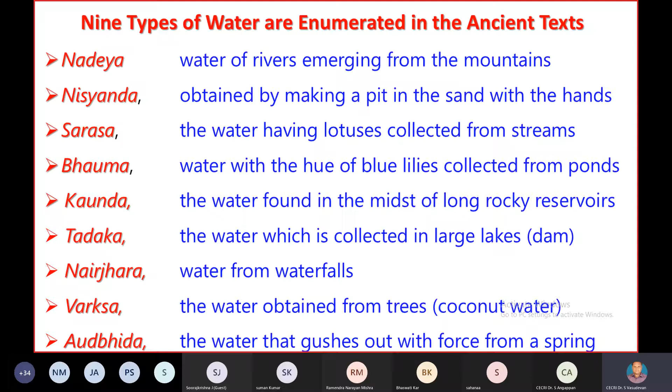If you see Earth's water, we have plenty of it. 97% of the world is covered by water, by the ocean. In that 97%, we have only 3% fresh water. Of that 3% fresh water, 70% is ice caps and glaciers, and the remaining 29% is groundwater. Of that 29%, only 1% is easily accessible fresh water, that is lakes, soil moisture, water vapor, rivers, and water in living things.

Even in that 1% of water, lakes account for 52% and soil moisture is 38%, with the remaining only 1% in living things. So we have to take care of this 1% of water, the lakes, soil moisture, and rivers, everything. Only then can we survive.

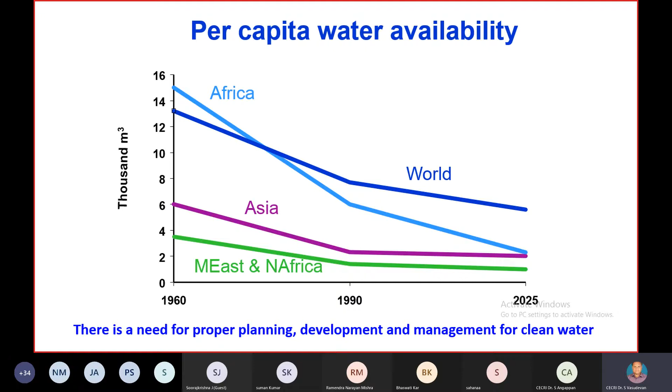In India, we are moving towards becoming a water stress country compared with the rest of the world. For that reason, we want to make sustainable or clean technology for the people living in India. You can see per capita water availability declining all over the world - in Africa, Asia, the Middle East, and North Africa. Everywhere, water per capita is decreasing, so we need proper planning.

If you take India, how is water affected or contaminated? Presently, pesticides, dyes, pharmaceuticals, fluoride, arsenic, iron, nitrate, etc. are the main groundwater quality problems in India. Apart from that, some other minerals are also contaminants, posing the largest threat to public health. We have to remove pesticides, dyes, pharmaceuticals, fluoride, arsenic, iron, and everything using a clean method.

Apart from that, salinity and chloride are also major problems in Indian groundwater quality. Let us see one by one.

As I said in the earlier slide, the main contaminants among inorganic compounds are arsenic, fluoride, nitrate, salinity, and iron. These are the main inorganic culprits in the Indian scenario, accounting for almost 50%.

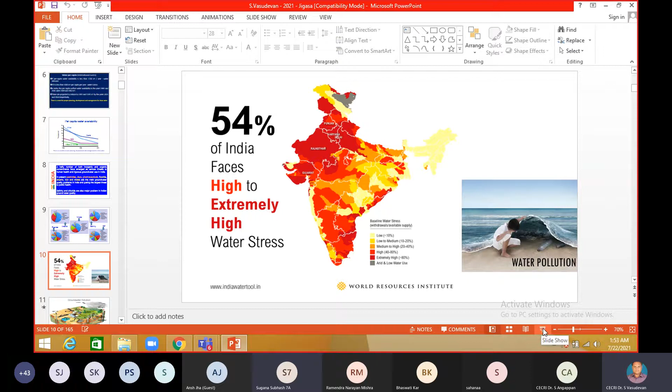Now you can see 54% of India faces high to extremely high water stress. Apart from the land, nowadays you can see water pollution in the sea. You can see one small boy observing how the water was polluted under the sea. So this is the situation in the Indian continent.

The main problem for groundwater pollution is many industries like pesticides and fertilizers and hazardous waste injection wells. So in many places you can get pollution in the groundwater.

So now what we need to do: suppose if you want to treat the water, it should be affordable, clean, and accessible. Please mute your mics. Your technology should be affordable, clean, and accessible.

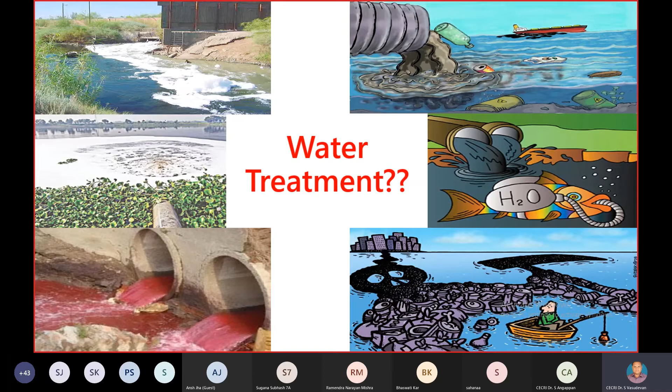If your technology is smart, it has to pass these three main things. So now we go for the water treatment process.

In water treatment technologies, you can classify them as biological process, physical process, physico-chemical process, chemical process, and thermal processes. Each and every process has a merit and demerit, that is advantages and disadvantages. So one cannot say that a technology is not good for treatment, but each process or technology is suitable for some type of water.

So today I am going to talk more about electrochemical water treatment technologies. So why electrochemical technology?

You can see this. This is called environmental compatibility. The main reagent used is electrons, so there is no residue formed. That is the main reason this is environmentally compatible.

The second one is flexibility. Many processes occur simultaneously in any electrochemical cell. Flexibility also means point-of-use production of disinfectants is facilitated by electrochemical technology, and a volume of fluid from microliters to thousands of cubic meters can be treated by this method, with the process working at room temperature and atmospheric pressure. These are the main flexibility aspects in the electrochemical process.

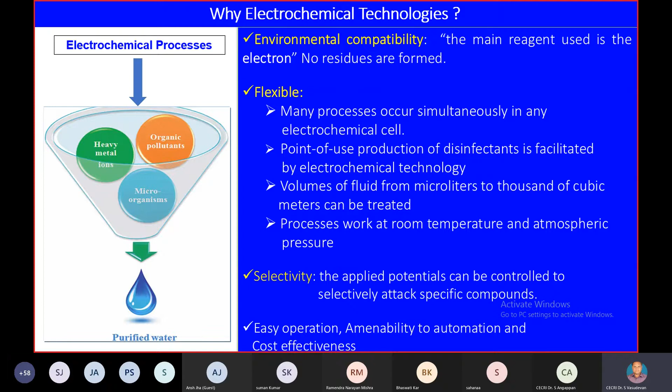And the last and final point is very easy operation, it is very easy to automate, and it is cost effective. That's why this electrochemical technology is a smart one for everyone.

So what is happening inside the electrochemical cell? Dear students, you can assume this is a tank, or a beaker, or a cell—whatever you want to assume.

In the electrochemical system or cell, you have one anode and one cathode. For example, I can say number one anode and one cathode, but it should be multiple anodes and cathodes in very big cells.

So at the anode, you can see 5 things taking place in the electrochemical cell. One is called the electro-oxidation process that takes place at the anode, and another, system number 3, is called electrodissolution, which is nothing but electrocoagulation.

In the electrochemical process, there are 4 processes. Number 1 and number 3 take place at the anode, and number 2, the electro-reduction, and number 4, electro-deposition, these processes take place at the cathode side.

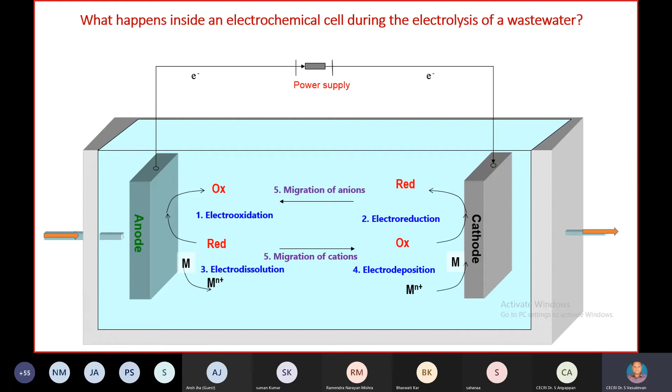So the anode side does one process, the cathode side does another. If you want to remove contaminants by electro-oxidation or electrodissolution, you have to look at the anode side. If you want to reduce or deposit the contaminant, you look at the cathode side. Also, the migration of anions and cations takes place. This is the ultimate electrochemical cell you have to see in your lab.

First, I can show number 3, that is called electrocoagulation or electrochemical dissolution—nothing but electrocoagulation. Here you can see, as I said, there is one anode, one cathode, and here a DC power source was applied. Then what will happen?

The anode will dissolve—some amount of metal will be dissolved as Me+, and at the cathode the water will be reduced and you get OH- ions. So these two reactions take place in the electrocoagulation process. You can see the equations here.

So electrocoagulation, as I told, is the in-situ generation of coagulants—meaning the adsorbing materials, the coagulant. Normally in the chemical method, coagulants are synthesized and kept in tins, and that is used for the removal of contaminants.

Here in our electrocoagulation process, you can generate the coagulant in situ. That means how much coagulant you want, you can fix by the current or potential. So if you want 1 gram of

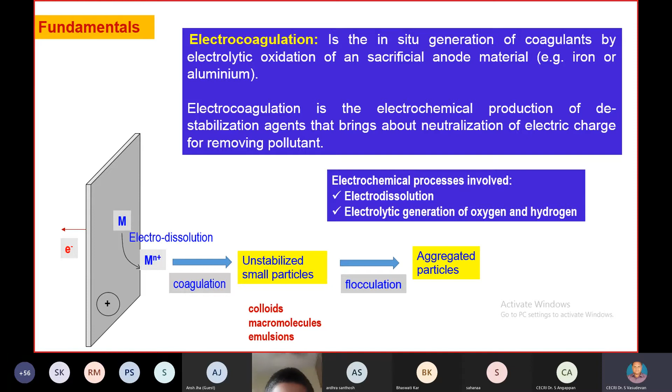If you want 1 gram of coagulant, you can fix the current and potential and remove the contaminant. This is the main advantage of the electrocoagulation process. And as I said, in electrodissolution the metal will be converted to metal ions, then it will be converted to hydroxides. You can see what the materials are.

You can use aluminium, iron, magnesium, and zinc. These are the 4 metals you can use as the anode. You can imagine it in the electrochemical cell. Here is number 3, that is electrodissolution, nothing but electrocoagulation. Aluminium, iron, magnesium, zinc, whatever the metal, you can choose depending upon the contamination.

Earlier aluminium and iron were used, but in my place in CECRI we used magnesium and zinc. We are the first to use magnesium and zinc as the anode material; earlier, in 1990, they used only iron and aluminium. Why I chose magnesium and zinc: if excess aluminium is present in drinking water, it is more dangerous than the contamination, because only 20 ppb of aluminium will affect your brain. That's why we chose magnesium and zinc.

With magnesium, even if you take more than the contamination, nothing will happen to your body. And zinc also, if you take more, nothing will happen to your body. In the present corona period, doctors are prescribing zinc tablets. So we used zinc as the anode material well before this pandemic period. We always use magnesium and zinc as the anode.

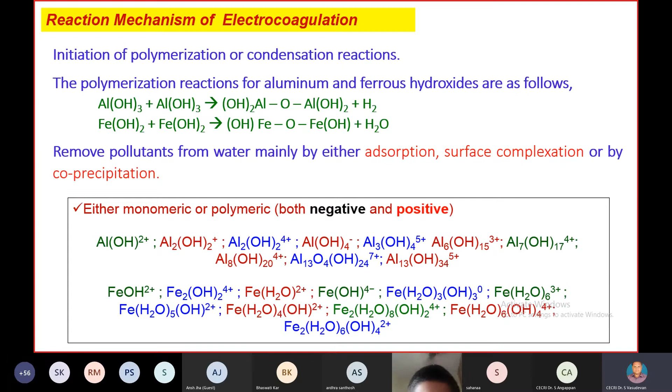In the previous slide, I told you aluminum will form aluminum hydroxide, but it won't form aluminum hydroxide directly. Plenty of intermediates will be formed with plus or minus charge during the electrochemical process. These will be removed by adsorption, surface complexation, or co-precipitation. Whichever the hydroxide, it will be removed by one of these three processes.

You can assume this is the aluminum hydroxide structure. The center is called the nucleus, a negatively charged particle, and around it there are positive charges. The nucleus may be negatively charged, positively charged, or mixed. Both negatively and positively charged intermediates will be in the cell.

So if your contamination is positively charged, it automatically adsorbs. If the positively charged nucleus is there, the negative contaminant will be attached. So whether your contaminant is positively or negatively charged, both will be removed by the electrocoagulation process. This is called the 5-step process.

Number 1 is compression of the diffuse layer by an increase of the ionic strength. That is, as the hydroxide is formed, there is a compression of the diffuse layer. The second step is neutralization of the superficial charges by the adsorption of ions. I told you if the nucleus is negative, the positive attaches, so that neutralization takes place in the second step.

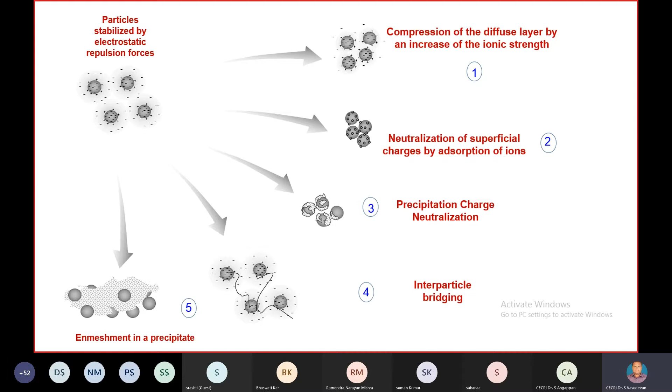The third one is precipitation charge neutralization. All things will be chemisorbed or physisorbed and converted to precipitation charges. The fourth one is interparticle bridging, and the fifth one is enmeshment in the precipitate. We are not able to see these 5 steps, but the removal takes place by this 5-step method.

By the way, dissolved organic matter is also removed by the electrocoagulation process. I mentioned electrocoagulation and electroflotation. What is electroflotation? You can see that on the anode side, there is oxygen formation.

In the cathode side, hydrogen will be evolved. Apart from the metal hydroxide, you can get oxygen in the anode and hydrogen in the cathode. So these two gases are very essential for the electrocoagulation process. One is for turbulence, one is for adherence. So these two gases favor the turbulence and the adhesion process.

That is, it promotes soft mixing conditions and improves the flocculation process. This is because of the turbulence, because of the gas evolved in the electrocoagulation process. Then the second use is adhesion.

Sir, your voice is not coming.

The gaseous microbubbles link to pollutant particles. Consequently, the density of the new species decreases, and this promotes the flotation of the particle. So oxygen and hydrogen will be used for the turbulence and adhesion process. So how can you use this electrocoagulation process for the removal of fluoride? What I said is fluoride in groundwater was higher in Indian states, that is more than 66.

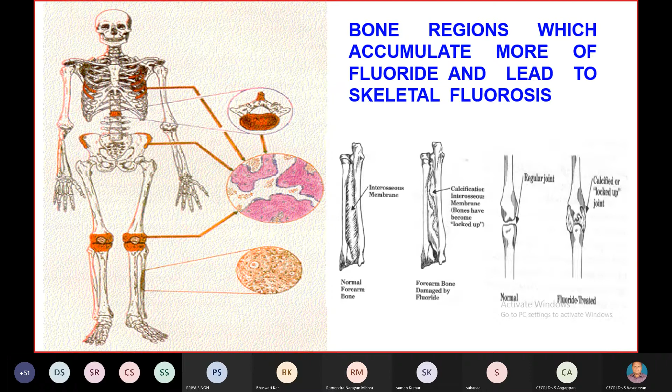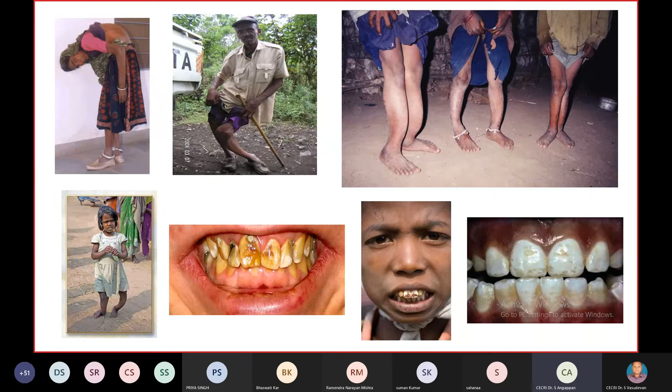Vasudevan sir, again muted, sir. Sir, Vasudevan sir, please. Now okay, sir. I don't know why it is regularly missing.

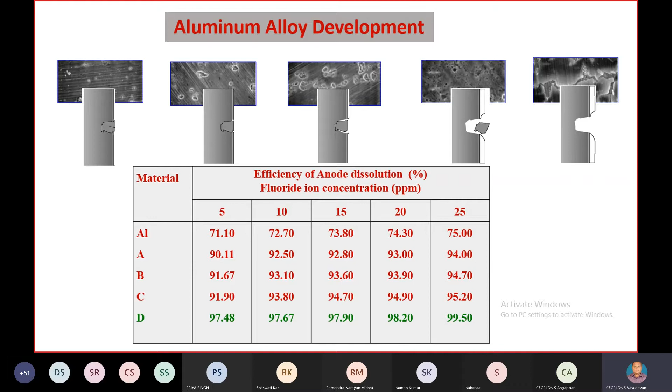So like this, disease will take place. And in our CECRI technology, the specialty is aluminum alloy development. As I told you earlier, if you are using aluminum, it will be dissolved in the water and there will be a problem for your health. So what we thought was to use aluminum alloys. These alloys will dissolve uniformly, and we have not found any aluminum contamination in the drinking water. So this is the speciality of our technology.

This is the anode side. On the cathode side, we carried out experiments with different types of cathode material: aluminum, stainless steel, and galvanized iron. We finally concluded that galvanized iron is the most suitable cathode for the electrocoagulation process. We also did experiments on the electrode configuration, whether it should be a monopolar or a bipolar configuration.

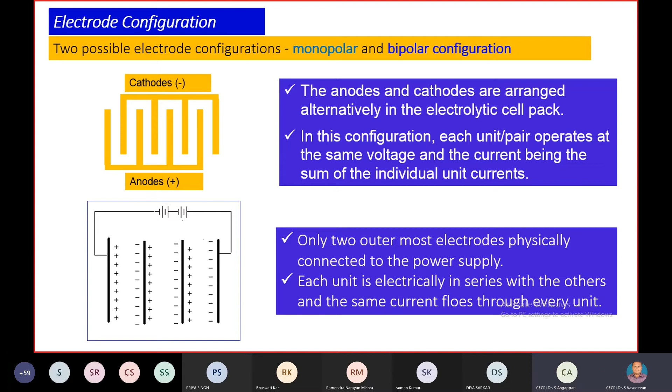Monopolar configuration means DC current is supplied to each and every anode and cathode. In bipolar configuration, only the terminal electrodes are supplied with DC current. We tried this type of electrode configuration in our experiments. We also tried the cell design in the form of a tank type or the flow type. In the flow type, we saw single channel or multiple channel. So we designed plenty of cell designs and came to the conclusion of a direct flow design.

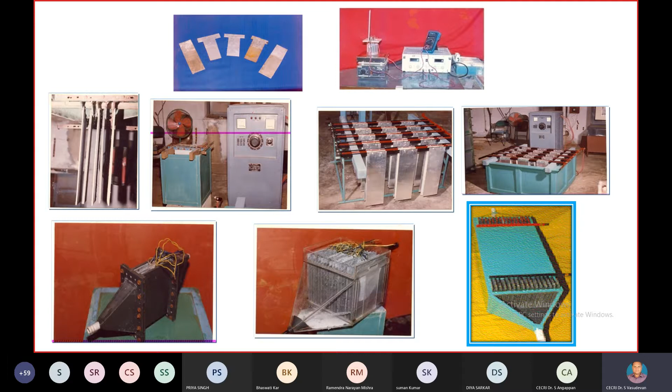You can see we started at the beaker level. Whatever experiment you start, you can start at your basic level. We started in the beaker, and now we have developed a very big electrochemical cell for fluoride removal. This is an example of the electrochemical cell and the chemical method. In comparison, both technologies remove fluoride from 200 liters of water per hour.

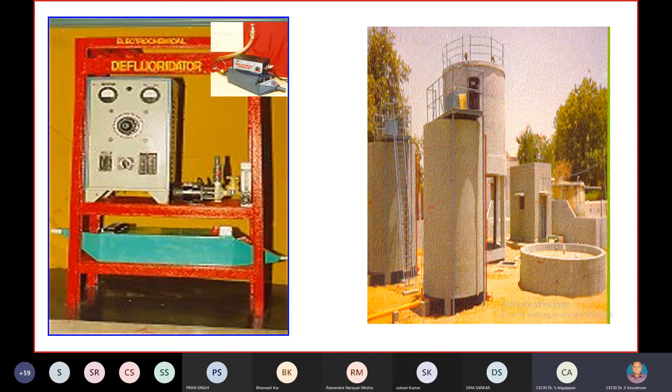You can see in the electrochemical method, the space requirement is very small. In the case of the chemical method, which people are using now, the space, utilities and everything are more. So this is the advantage of the electrochemical method. This is the simple design of an electrochemical defluoridator of 100 liters per hour capacity, and it can be operated by solar photovoltaic cells.

You can see the data. We took fluoride at 5 ppm as the maximum level. The limit is given as 1.5 ppm, but our technology removes it even below, to 0.5 ppm of fluoride. We also tested chloride, calcium, magnesium and other ions. You can see aluminium: in the feed water it is not there, and in the defluoridated water it is also not detected. That means our aluminium alloy is well suited for the electrochemical process.

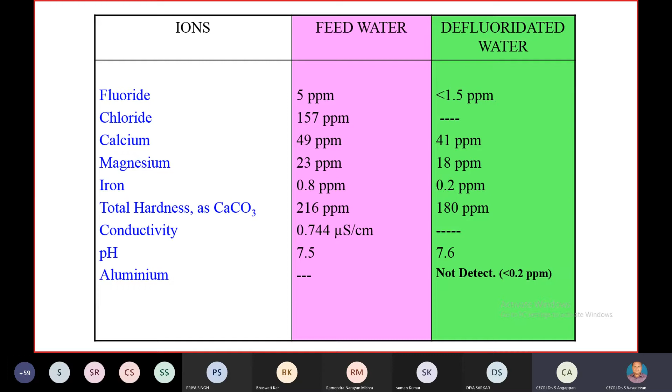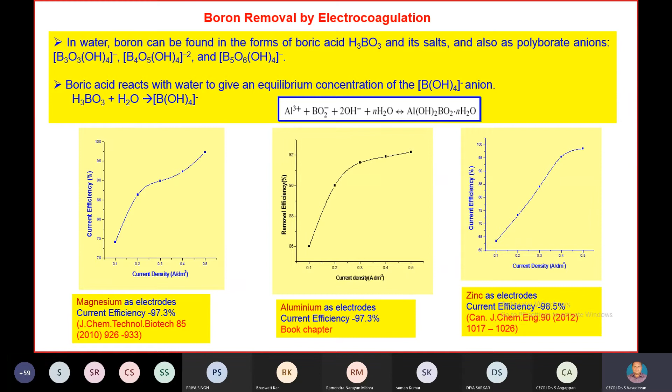So now I am taking water contamination by agricultural activities. India is mainly agricultural. So we thought we could test whether agricultural contamination can be removed by this method. We tried boron, which is also a main contaminant in agricultural lands. We got more than 95% removal efficiency for boron by the electrocoagulation system, and also for phosphate and nitrate, which come from fertilizers. So it is possible to remove phosphate and nitrate too. These phosphate and nitrate are inorganic contaminants.

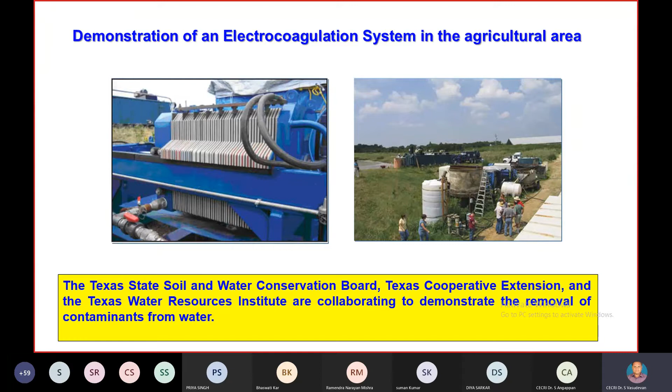At the anode, as I said, one is the electro-oxidation process and another is the electro-dissolution process, that is 1 and 3. Now this is number 1 in the electrochemical cell, called electro-oxidation technologies. Electro-oxidation is one process, but it can be divided into 3: direct electro-oxidation or electrolysis, electro-oxidation by the indirect method, or the advanced oxidation process. These are the 3 types of electro-oxidation technologies, clean technologies available by the electrochemical route.

Like electrocoagulation, there are plenty of options for the anode material, like platinum, stainless steel, boron-doped diamond electrodes. So you can choose which anode is suitable for your contamination and for your pH and conditions. In general, they talk about low efficiency anodes and high efficiency anodes. What does a low efficiency anode mean? Suppose you take phenol as the example: your water has phenol, which is an organic compound.

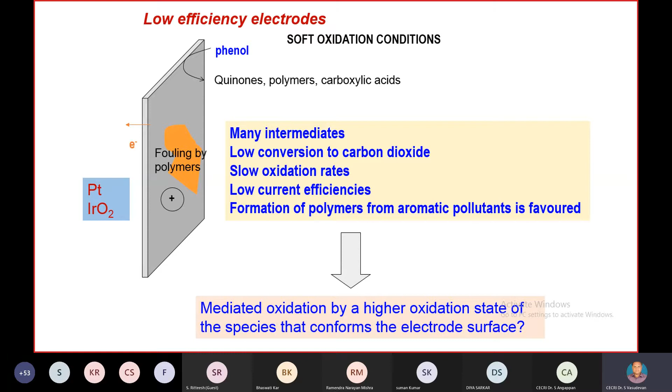For example, if you oxidize phenol, you can see quinones, polymers and carboxylic acids in the water. That means your organic contaminants are still in the water. With a high efficiency electrode, the same phenol you oxidize gives only carbon dioxide, which is the final ultimate product. No intermediates, high efficiency and large current efficiency.

That is, for example, the boron doped diamond electrode, called BDD, or lead dioxide coated. I am giving examples, but there are plenty of high efficiency electrodes available. So one can choose which electrode is suitable for your condition, your contamination, depending upon your solution. Likewise, there are plenty of cathode materials like titanium, mild steel and stainless steel that you can choose depending upon your situation or environment.

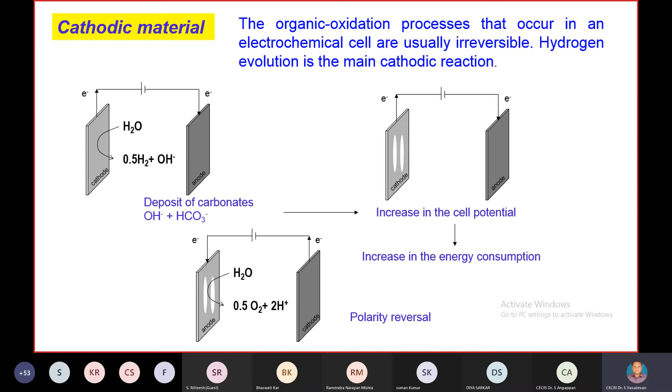Then, like electrocoagulation, you can design the cell, but here the design is different. Here you can make a divided cell or an undivided cell. Whatever contaminant is oxidized should not be reversible. Sometimes it will reach the cathode and again be reduced into the starting material; for that you want a divided cell. If the end product is not reversible, you can use the undivided cell. So here also you can choose a divided or undivided cell.

The next one is nitrate in groundwater. We all know that nitrate contamination is high in India because of fertilizer. With nitrate, you can see the blue baby syndrome. In most village primary health centers, newborn children will be blue in color in the fingers of the legs and hands and in the lips. The doctor says there is an oxygen deficiency, so he will give oxygen to the children.

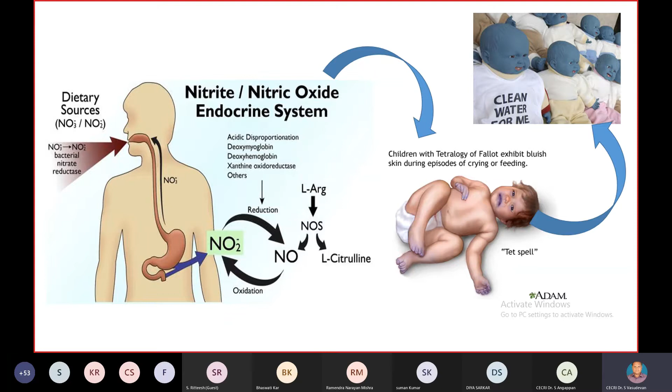Then the blue color will disappear. Because of the nitrate-contaminated water you are taking, it will be converted to nitrite, which takes the oxygen from your body to convert back to nitrate. This system happens in the body, meaning the oxygen in the body will be taken by the nitrate ion. So if you want to remove this type of blue baby syndrome, the water should be free from nitrate.

For that we also did preliminary experiments with different types of anodes and cathodes under an Indo-French collaborative project. We tried very big and small sizes, and finally we got one small electrochemical cell that will remove the nitrate.

Another one, the second type, has no direct electrolysis taking place at the anode. Here it is indirect oxidation. Indirect oxidation means you are generating oxidants, such as silver(II), cobalt and cerium. These oxidants you can generate in the cell, and the oxidant will oxidize your contamination. This is called the indirect oxidation process.

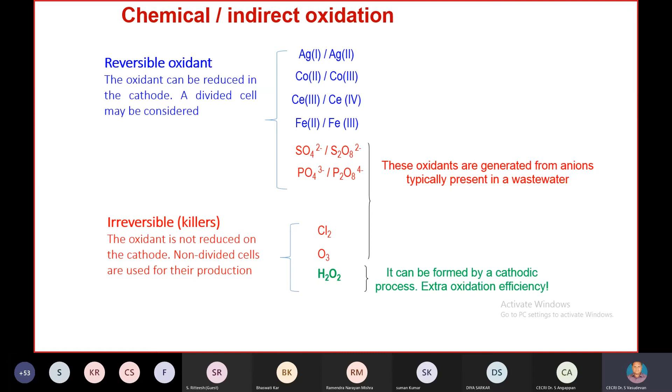Another one is irreversible, called killers, such as chlorine, ozone and hydrogen peroxide. These are all irreversible oxidants. So you can use either reversible or irreversible oxidants to oxidize your contaminant. These are a few examples for silver and cobalt, showing which organic contaminants will be removed.

Another one is sulfate to peroxydisulfate. If you have sulfate as the contaminant in your water, you can convert the sulfate to peroxydisulfate, S2O8, which is a powerful oxidant. Here you are using the sulfate contaminant and indirectly using the same sulfate as the oxidant. Another one is hypochlorite.

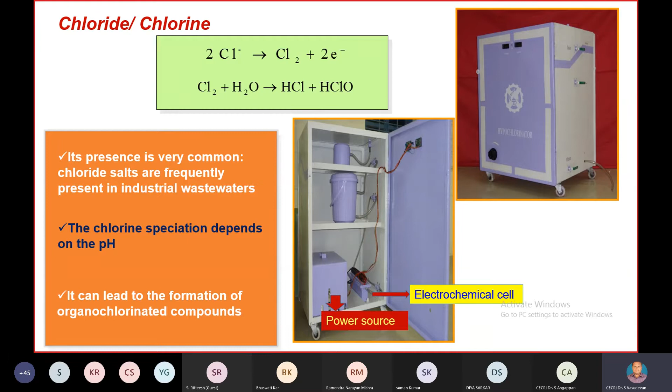You very well know that chlorine and hypochlorite are disinfectants in the present pandemic situation. This also you can generate by the electrochemical process. Another indirect oxidant is ozone. This also you can generate by the electrochemical method. Why ozone and why hypochlorite? Hypochlorite has less oxidation power, ozone has more oxidation power. So if you are not able to oxidize by the hypochlorite, you can use the ozone. Both will be generated by the electrochemical method.

And another is hydrogen peroxide. This has medium oxidation power. So hypochlorite, hydrogen peroxide and ozone are all the main oxidants that can be generated by electrochemical methods. Okay. Another one is the advanced oxidation process, the third type. Suppose you are not able to oxidize the contaminant by the indirect or the direct electrochemical process, you can use the AOP, that is, advanced oxidation process.

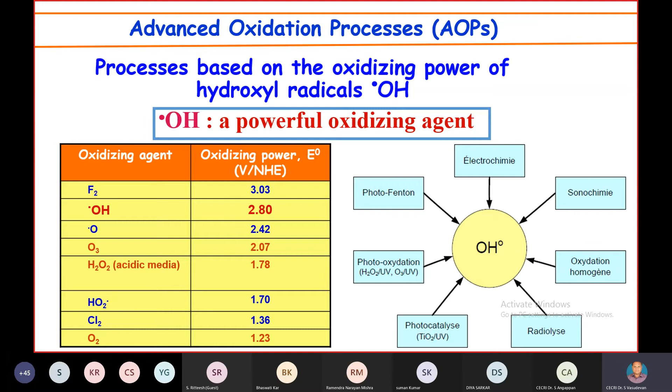Here the process is based on the oxidizing power of the hydroxyl radical. You can see in the table hypochlorite, ozone, hydrogen peroxide. The more powerful is the OH dot. This OH dot has an oxidizing power of 2.80 V versus NHE. So this will oxidize whatever organic contaminant, the persistent organic compounds, that you are not able to oxidize by the earlier methods. You can oxidize them by the advanced oxidation process.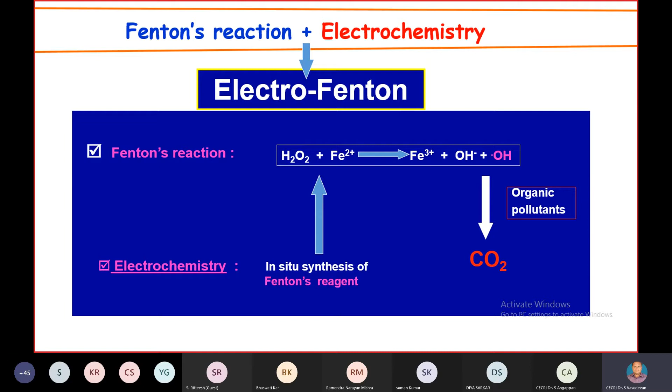This is called the Fenton reaction. People think Fenton is the chemical method: you add iron and hydrogen peroxide. This is called Fenton, normally. Is it possible by electrochemical method? That is called the electro-Fenton process, and yes, it is easy. You can generate the hydrogen peroxide in the electrochemical cell, so there is in situ formation of the Fenton reagent. The advanced oxidation process is nothing but using the Fenton reagent for the electro-oxidation process.

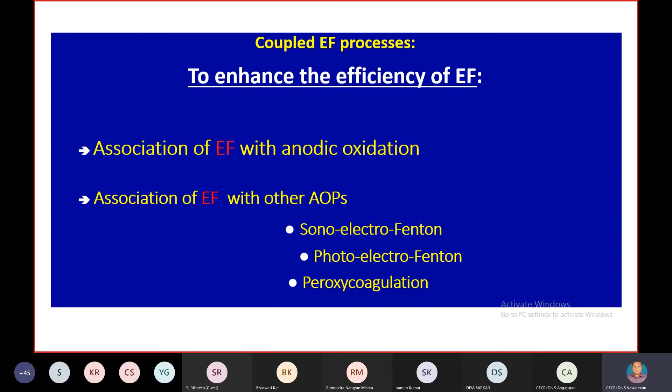So you can easily generate the Fenton reagent by the electrochemical process, called the electro-Fenton process or advanced oxidation process. This can be coupled with different types of systems like sono-electro-Fenton, photo-electro-Fenton. Photo means you use photons, and sono means you use sonic energy for the electro-Fenton process. Then there is peroxycoagulation, a coupling of coagulation and advanced oxidation. You combine the advanced oxidation process and coagulation process. This is one type.

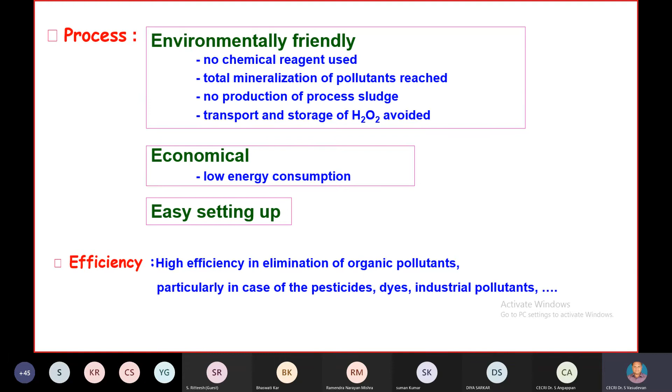Once you understand electro-Fenton, electrocoagulation and electrooxidation, you can immediately think of how to combine the different processes. That's why you have to learn all the different processes. Ultimately the process is environmentally friendly, economical and easy. Setting up this electrooxidation or advanced oxidation process is very environmentally friendly.

Iron in groundwater is common, but there is no electrochemical system for iron removal. But indirectly, if your water is contaminated with iron, you can aerate the water, so the iron hydroxide will precipitate out, then you can filter it. That means you can generate oxygen by the electrochemical method, pass that oxygen and oxidize the water. So here it is the indirect electrochemical process, not the direct oxidation process.

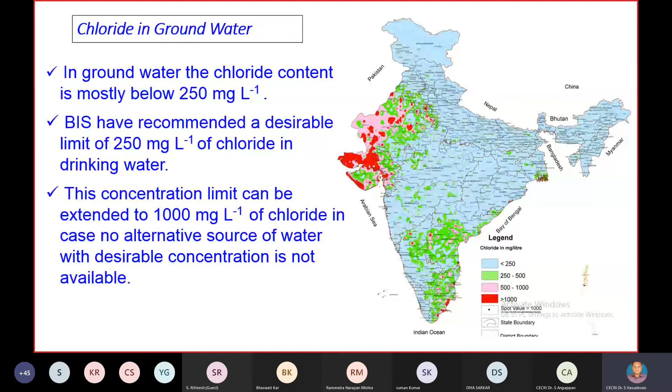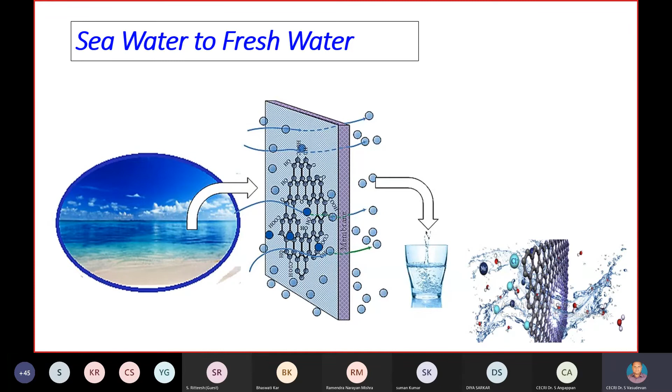Salinity and TDS in groundwater are very serious. Now we can see how to remove them by electrochemical methods. Chloride in groundwater you see only in seashore areas like Mumbai, Chennai. Only there you get more chloride in the groundwater, not in the central part of India. So seawater or seawater-contaminated groundwater can be converted to fresh water. This is our ultimate goal. This will be done by desalination of water.

Okay. Another newly developing technology is capacitive deionization, that is, electrosorption. You pass the current; deionization occurs by applying voltage over two porous carbon electrodes. So your positive and negative charges will be attracted by the negative and positive sides of the electrode. Thereby you can remove the chloride and sodium by the capacitive deionization process.

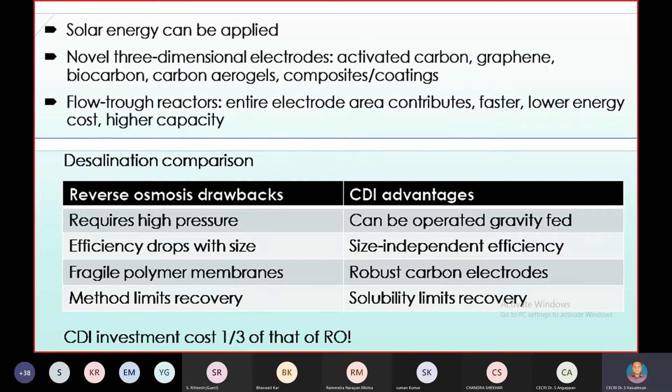After that you can reverse it, all the ions will come out, and you can filter it by the opposite direction. This is a very good advantage, like you can work it with solar energy. This is the novel three-dimensional electrode you can use. This has many advantages over existing reverse osmosis systems, which have large drawbacks. So this is the simple system you can use for this type of capacitive deionization system. This is the simple electrochemical cell for the capacitive deionization process.

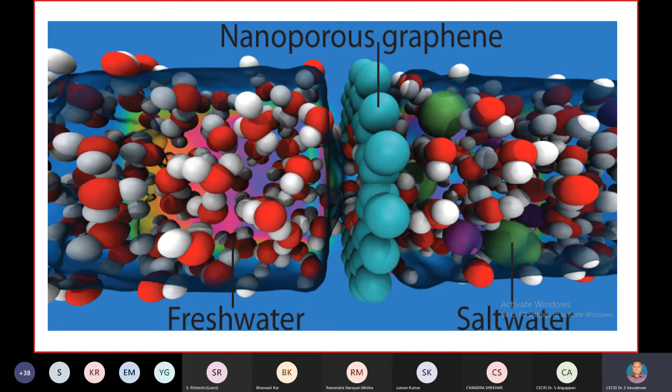Nowadays, you can see graphene. You may have heard about graphene, now it is picking up. What I can say is this is the magic membrane for desalination. So nowadays people are using conventional membranes. If graphene membranes are developed, this will be very much useful for RO systems for filtering anions and cations. You can see this nanoporous graphene, with fresh water and saline water. Very easily, using the nanoporous graphene, you can separate the salt water and get fresh water. Still, the research is going on. The salt rejection percentage is more in the case of graphene. So people are now using graphene membrane for reverse osmosis technologies.

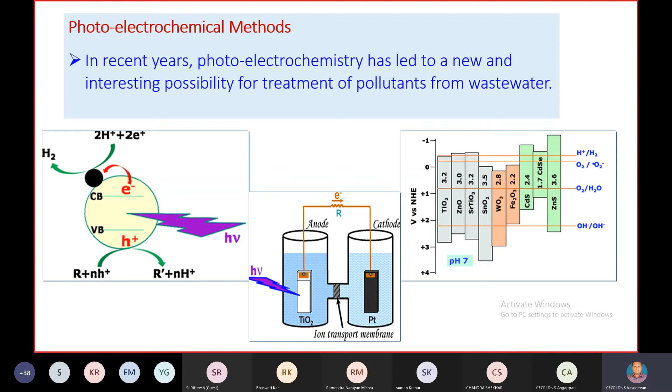So these are all the CSIR CECRI technologies relating to different ions based on smart technologies, I can say electrochemical technology. That means there is no secondary pollution after the treatment. Another thing is the photoelectrochemical method. The work is still going on. This uses photons - we use sunlight and convert contaminated water to clean water.

So in summary, the electrochemical methods are generally cost efficient and environmentally benign purification processes, and enhancement of the methods is often related to material development only. So optimization of the treatment is highly important, especially pH, in most of the process. Once the system was developed, you can just see the anode and cathode, and that's all. Very small experiments can be done for the upgradation of cells.

So up to this, I can talk about the smart technologies for water treatment - that is electrocoagulation and electro-oxidation of three types, and also electrodialysis for the removal of TDS. Now the first part, that is clean water, will be over.

Now I can come to green energy. Today I am going to talk about hydrogen. Hydrogen is the green energy for the present situation, meaning we are going from carbon-based energy to renewable energy, C2R. Earlier we used carbon-based energy and we got CO2 contamination in the atmosphere - that is C. Now we are proceeding to R, that is called renewable energy, free from CO2. Hydrogen is very unique in the periodic table, first in the periodic table. Henry Cavendish discovered it in 1766, and the first industrial water electrolyzer was developed in 1888 - that is, only with a water electrolyzer can you get hydrogen. That was developed in 1888.

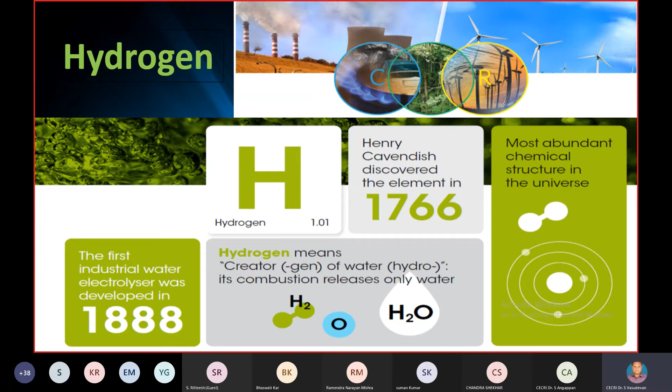So these are all the features of green hydrogen. Suppose in your mind, energy means your eyes look up - that is, you are seeing the sun. That is the ultimate energy. The clean energy is the sun's energy. We are getting 5.6 into 10 power 24 joules per year. So this much clean energy we are getting. For example, the energy emitted in one hour by the sun is adequate to cover the energy needs of the entire world population for one year. You can see how much energy the sun is giving to the earth. So we have to utilize the sun's energy for our future as clean energy.

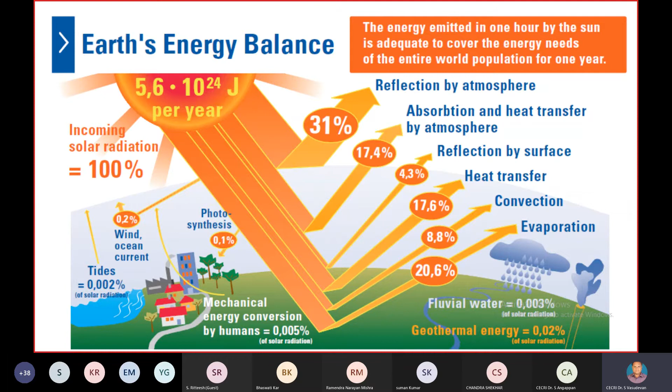If you take the energy storage system, we have plenty of energy storage systems called batteries, pumped hydro systems, flywheels, supermagnetic storage, and heat energy storage. You can generate energy by different methods. So here I am going to talk about only the energy based on hydrogen.

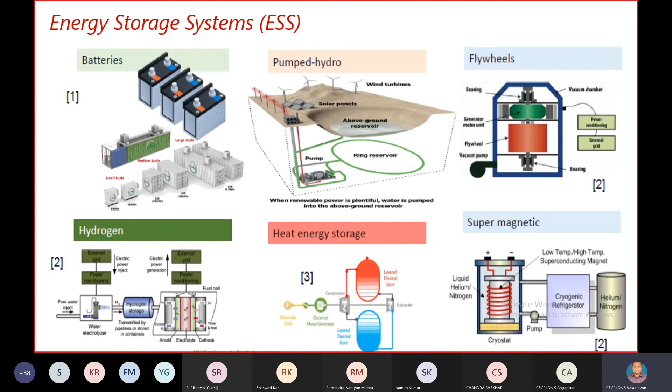So why am I talking about hydrogen? The World Organization said to reduce greenhouse gas emissions by 17% by 2020 and 83% by 2050 from the 2005 baseline. This is the world standard for greenhouse gases, and to reduce net oil imports by half by 2020 from 2008. There are 5 rules given for climate change, and hydrogen at scale strongly impacts number 1, number 2 and number 4. So in these 3 places, hydrogen will play a vital role for green energy for the world.

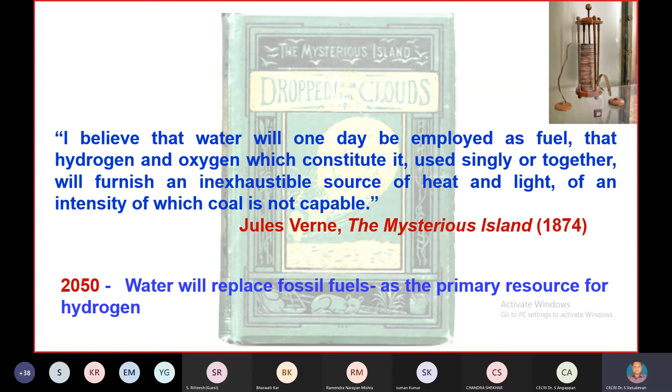In 1874, Jules Verne said, 'I believe that water will one day be employed as fuel, that hydrogen and oxygen which constitute it, used singly or together, will furnish an inexhaustible source of heat and light, of an intensity of which coal is not capable.' These words were written in 1874 itself. They predicted that in future hydrogen will be the main energy for the world. I can assume the world is assuming that by 2050 water will replace fossil fuels as the primary resource for hydrogen. So in 1874 itself, it was predicted that hydrogen is the ultimate energy for the world.

This is the petroleum age, which you can take as the transport side. In 1956, Hubbert predicted the oil production rate, from 1900 to 2100. This graph was drawn in 1956. They said that oil will be completely zero in 2100, not 2050, not 2060. But even in 2040 we need oil. The peak oil production was around 2000, and by 2025 the price of oil is assumed to be $100 per gallon. Automatically the price will keep rising, and by 2100 we assume there is no oil production in the oil wells. So we are going towards zero oil by 2100.

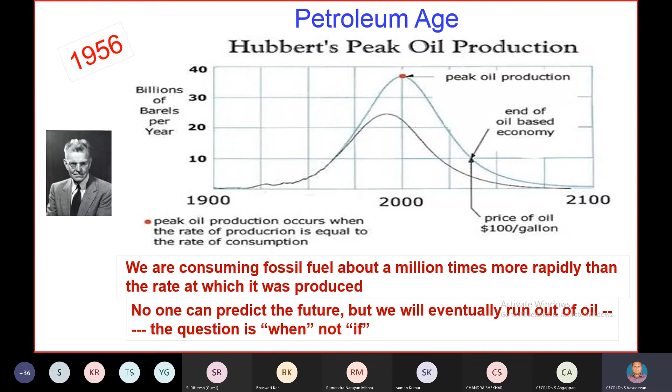So to achieve these goals, India has made the Intended Nationally Determined Contribution, called INDC. India's plan is 40% of power from non-fossil fuel by 2030, and to reduce the emission intensity of its GDP by 33 to 35% by 2030 from the 2005 level, and create an additional carbon sink of 2.5 to 3 billion tons of CO2 equivalent through additional forest and tree cover by 2030.

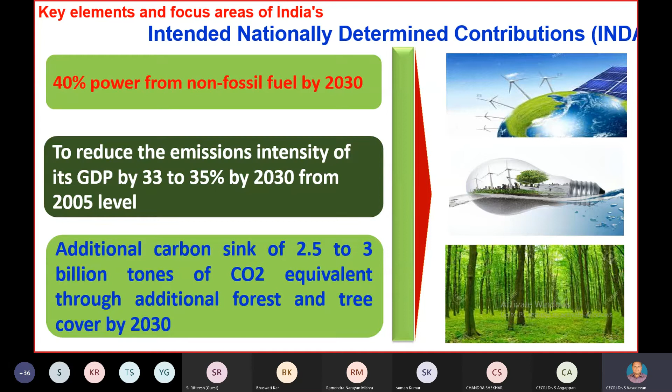So whatever you are developing, hydrogen or batteries, whatever it is, we also have a plan to grow trees. I'm requesting all of you to grow trees. We can remove CO2 by 2.5 to 3 billion tons from the atmosphere through afforestation.

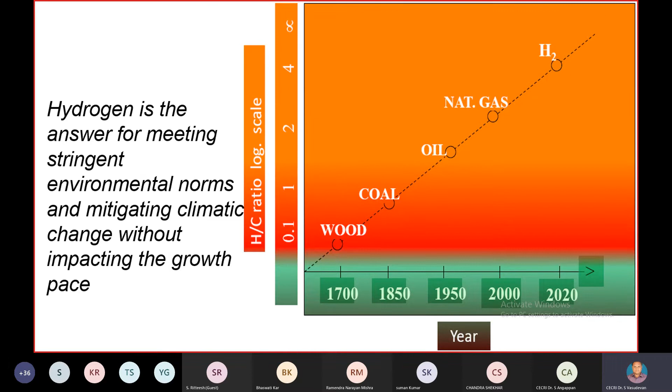So now, why am I talking more about hydrogen? What is the big deal with hydrogen's properties? I am going on talking about what is there in hydrogen.

You can compare the energy density in megajoules per kilogram. Lithium battery has 0.54, gasoline has 46.9, and hydrogen has 140 megajoules per kilogram. That means hydrogen has 220 times more energy than batteries and 2.6 times more energy than gasoline. This is the big advantage with hydrogen. Also, the upper heating value is more for hydrogen than methane, diesel and gasoline. That's why the entire world is talking more about hydrogen nowadays.

And apart from that, hydrogen is multifunctional. It is used for transportation and also in industries, transport, heating, and power generation. So it connects energy, mobility and industry. This is the multifunctional nature, that's why it is more advantageous, energy wise and functional wise.

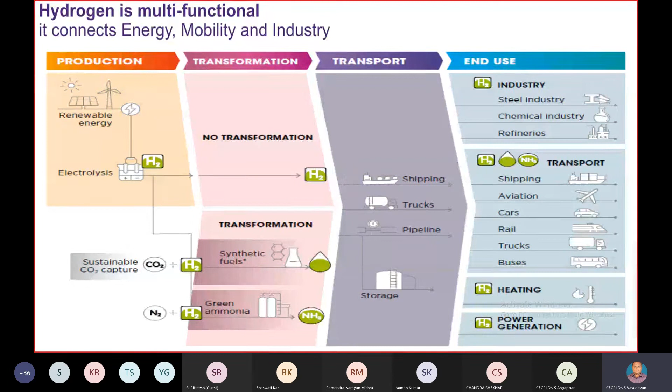It is advantageous. So before going to hydrogen, what are all the things you have to think? If I want to drink water, I have to see whether I go by walk or by run. So many factors are there to drink one cup of water. So before going to hydrogen, what are all the things you have to do?

One is production, then storage, how to transport, how to deliver, and what are all the applications, what is the efficiency, and we have to give awareness about hydrogen, and you can also take care of the safety codes and standards. So it is not very easy to implement hydrogen energy immediately. You have to think of each and every angle, from production to the end, to safety.

In earlier days, people were very much afraid to use LPG gases. Now everywhere LPG gases are used because of the safety codes and standards. Like that, for hydrogen also, it is not just production, storage, or delivery, but you have to give the safety codes and standards for hydrogen energy.

Suppose in the case of hydrogen production, I am talking more about hydrogen production, meaning we are concentrating on hydrogen production origin. So hydrogen production means you can think you can simply split the water and get hydrogen and oxygen, but it is not like that. Even in production, there are different colors, called green hydrogen, gray hydrogen, blue hydrogen, yellow hydrogen,

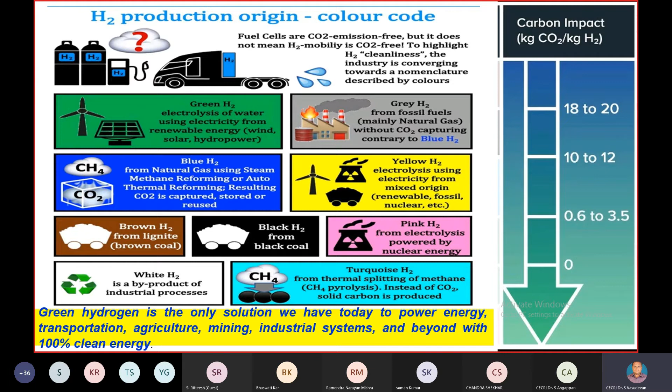Yellow hydrogen means electrolysis using electricity from mixed origin, that is renewable, fossil fuels, nuclear, etc. So depending upon the preparation method we can call it gray, blue, yellow, like that. So ultimate is green hydrogen, that is electrolysis of water using electricity from renewable energy only, either wind, solar, or hydropower. That means the carbon impact is zero for green hydrogen.

That means green method of production of hydrogen. In green hydrogen, you are electrolyzing using renewable energy. In that, we have three systems, called alkaline electrolysis, PEM electrolysis, and high temperature electrolysis. Each of these terms is different. If you take alkaline, the electrolyte is KOH. In the case of PEM, the membrane itself is the electrolyte. The high temperature one needs more temperature. So we can see one by one what are the three types of electrolysis.

One is without electricity, that is from renewable. Another one is with electricity from renewable. Whatever the case, the thing is renewables. You can produce hydrogen by renewable sources.

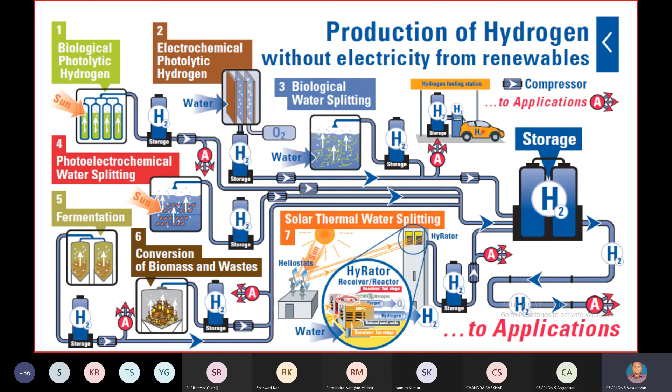If there is no electricity, but the source is renewable, you can choose biological photolytic hydrogen, or electrochemical photolytic hydrogen, or photoelectrochemical water splitting, or biological water splitting, or fermentation, and solar thermal water splitting. So these are all renewable, but you need not use electricity. By this way also you can produce hydrogen, without bothering about electricity, but this is the renewable approach.

Another approach is renewable but with electricity. You can use electricity from a renewable source, that is hydropower, wind power, bioenergy, geothermal, solar thermal. So there are two types of methods: you can produce hydrogen with electricity and without electricity by the renewable process. So you can opt for either electricity or without electricity for green hydrogen production.

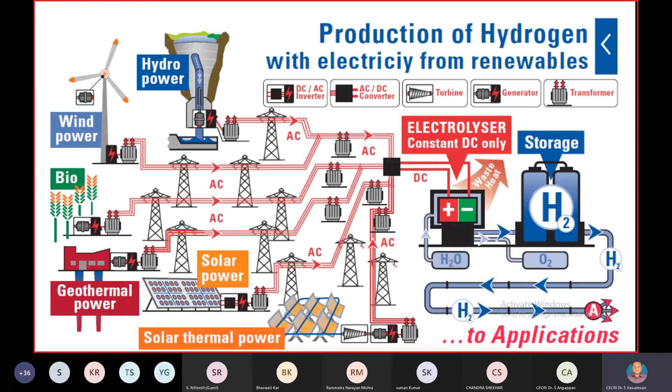And you can see the first type is alkaline electrolysis. What I said is you can use potassium hydroxide as the electrolyte. Here you can use 25% KOH, that is, highly concentrated KOH or NaOH will be used as the electrolyte, and you can electrolyze. You can get highly pure hydrogen. The temperature is 80 degrees centigrade.

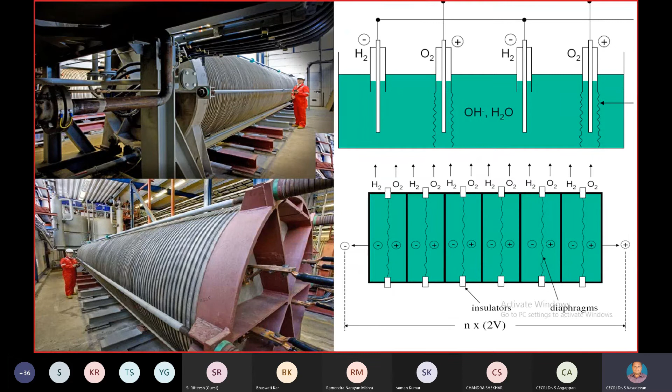Okay, for that, 4 to 5 units is required to produce 1 meter cube of hydrogen. This is one type of electrolyzer called the alkaline electrolyzer. You can see this is a 100-year-old technology, but still research is going on to improve the efficiency of the electrolysis system.

For that, our contribution is we developed a new electrode, that is, the anode, for this type of alkaline electrolyzer, that is high surface area nickel. Till our development, this type of electrode was imported from foreign countries. Now under Atmanirbhar Bharat, this is indigenously available. Now people are using our technology in the alkaline electrolyzer.

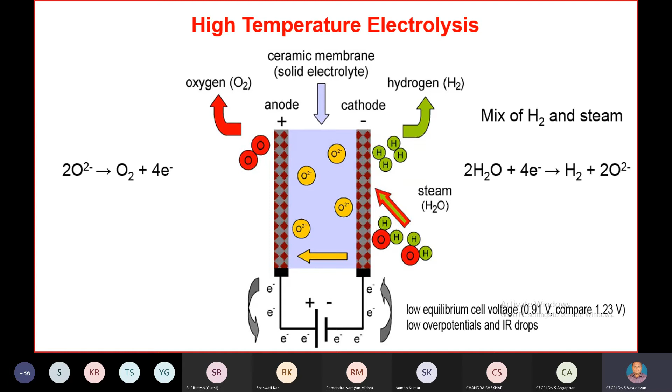And this is the high temperature electrolyzer. It requires more temperature, almost 800 to 900 degrees centigrade. So wherever the temperature is in excess, you can use high temperature electrolysis. In most places this type of electrolysis is not suitable. So still research is going on for the ceramic membrane and anode and cathode materials.

Another one is called proton exchange membrane. This is our new thing, our technology. This is called proton exchange membrane. We developed it from start to bottom in our laboratory.

Here we need a membrane. In the alkaline electrolyzer we want KOH, NaOH or a liquid electrolyte. But in the case of solid polymer electrolyte, that is called proton exchange membrane, you need only purified water. The membrane itself acts as the electrolyte. That is, you can generate hydrogen from water only. No need of any electrolyte, acid or alkaline. This is the main advantage of the proton exchange membrane.

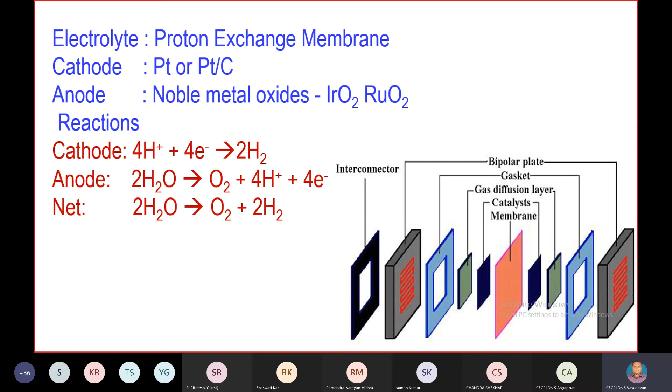So here the electrolyte, as I said, is the proton exchange membrane, but the disadvantage is we are using noble metal oxides, and noble metals are not available in India. So now our laboratory is going for non-noble metals. Whatever material is available in India, we have to try for indigenous technology. Until now, the materials were all imported from foreign countries.

So like that, you can select different electrocatalysts like rutile type, perovskite type, spinel type. Plenty of anodes are available. You can try. And in the cathode also, you can go for different cathodes like noble metal, non-noble metal. Noble means it is costly, non-noble metal is less cost. So we are now going towards non-noble metals.

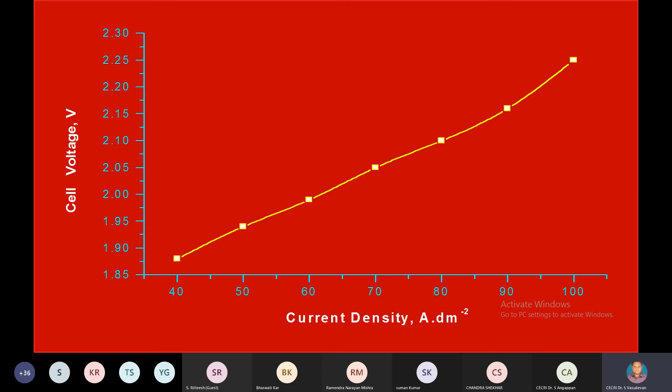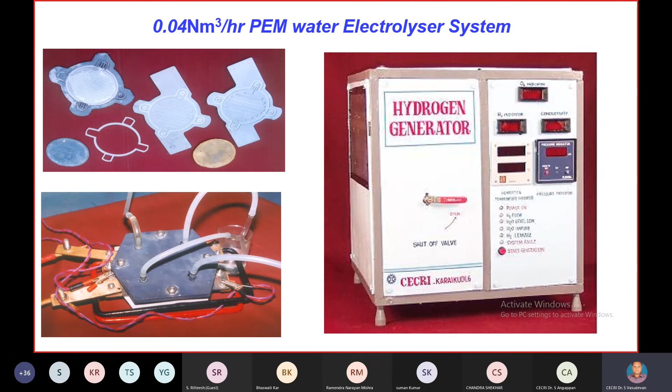Then we went for double, that is 0.4 meter cube, double the capacity of the first one, and we tested it. And again we went for the capacity of 0.8 meter cube. And finally we got to 5 times more, that is 1000 liters, or 1 meter cube of hydrogen by the PEM water electrolyzer unit. Even though it is developed, the raw material will always depend upon foreign countries. If you go for the indigenous one, it is very fruitful for Indian technologies.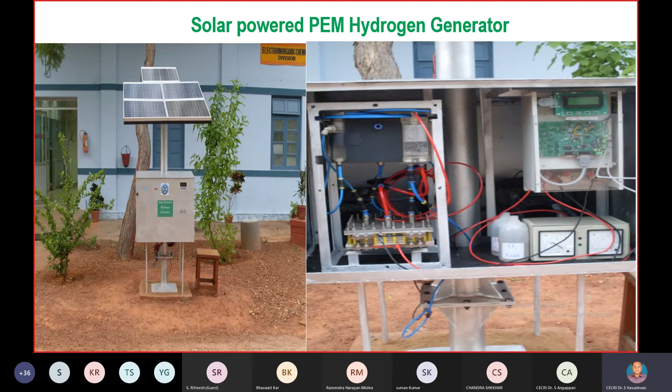And finally, this technology was transferred to Indian industry. Our technology was installed in Oman for metallurgical purposes. And after that, we are now doing the solar powered PEM hydrogen generator. So as I told, we are getting the energy from solar, that is, from renewable sources, and electrolyzing.

If you come to visit CECRI, you can see this type of research going on in our lab. I am very happy to see that our technology is competent with the other international technologies. If somebody wants to do research on this type of electrolyzer, you have to develop more durable and less expensive membranes, indigenous ones, develop long-lasting membranes and corrosion-resistant bipolar plates, and develop durable, low-cost and active anode and cathode catalysts.

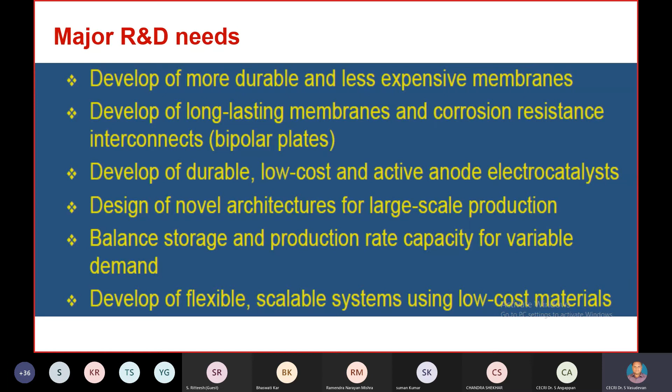Research is still going on in all the R&D activities. If you want, you can go in this angle for research and activities. As I told, only if purified water is sent to the electrochemical cell will the hydrogen be obtained.

Now people are asking, why don't you use seawater as the source? Because we have plenty of seawater. So is it possible to get hydrogen from renewable energy and a renewable raw material? Both are plentiful in India. So research is going on in this angle. We are taking seawater and electrolyzing it.

But it is not very easy to electrolyze seawater, because chlorine will come out in place of oxygen. So we have to suppress the chlorine and go for the oxygen. This is the challenging one, and this type of research is going on. And also, as I told, we are going towards non-noble catalysts and also photoelectrochemical generation of hydrogen. So these are all up to the production level.

The next one is storage, that is, how to store. If you produce hydrogen, as I told, production, storage, delivery, everything is very important. From the storage point of view, research is still going on, divided into a near-term approach and a longer-term approach. You can store it in a cylinder or cryo-compressed, or you can use metal hydrides, sorbents or chemical hydrogen storage. Research is still going on into which type of storage material is most efficient for hydrogen.

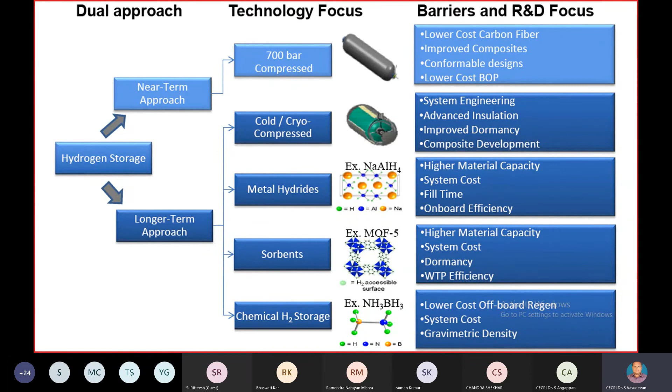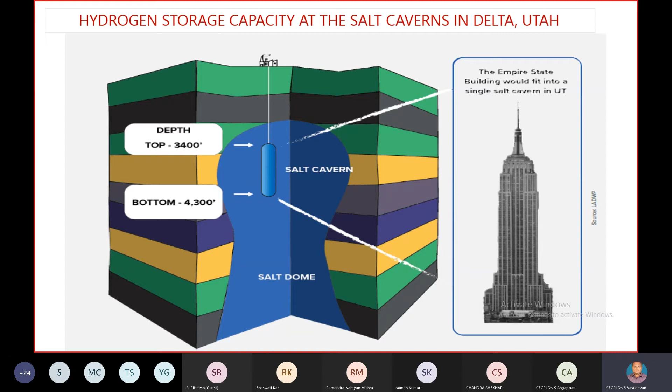One more type of hydrogen storage in the US is underground storage, where hydrogen is stored in salt caverns. What are the advantages of this type of storage? Nowadays in the US, people are storing hydrogen in salt caverns because with these facilities, hydrogen gas can be stored for days, weeks, months, and even seasons, to be dispatched on demand as clean fuel for carbon-free gas turbine power generation. So whatever capacity you want to store, you can store it. This is the main advantage.

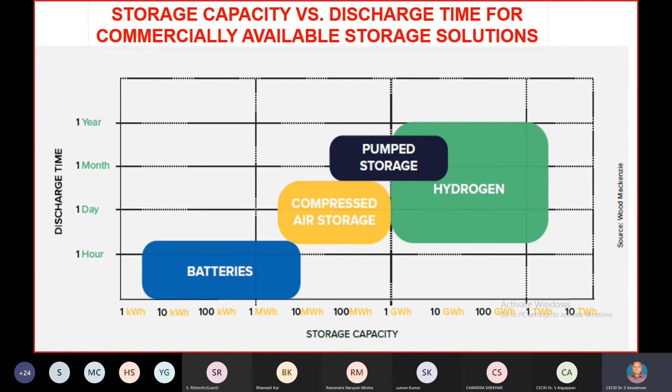Another one is the storage capacity. You can store even at gigawatt scale. You can see batteries, compressed air storage, pumped storage, and hydrogen. You can store plenty of hydrogen in a single place. This is also a main advantage. Then you can go for hydrogen applications. Research is still going on in production, in hydrogen storage, and even in hydrogen application. I will just touch upon fuel cells, the direct application of hydrogen, where you can get clean energy.

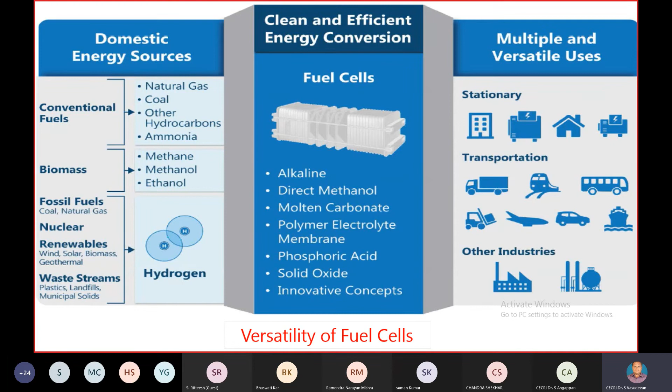Why fuel cells? It is the versatility of the fuel cell. You can get hydrogen from any method, natural gas, coal, ammonia, methane; whatever hydrogen you are getting, you can use in a fuel cell. Depending upon the source, you can make the fuel cells: alkaline fuel cell, direct methanol, molten carbonate, polymer electrolyte, phosphoric acid, solid oxide. Many types of fuel cells are available, which are very useful for versatile uses like stationary, transportation, and other industries. Once hydrogen is produced as a fuel, you can use it in the fuel cell for multi-purpose use.

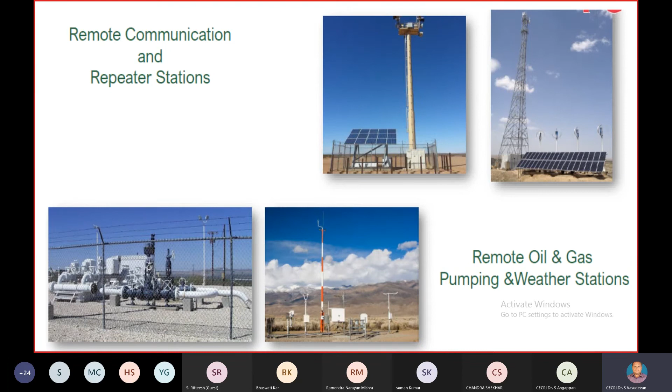For example, in remote communication places the hydrogen fuel cell will be used, and repeater stations, remote oil and gas pumping and weather stations, mining operations, villages and remote farming, everywhere hydrogen-linked fuels will be used.

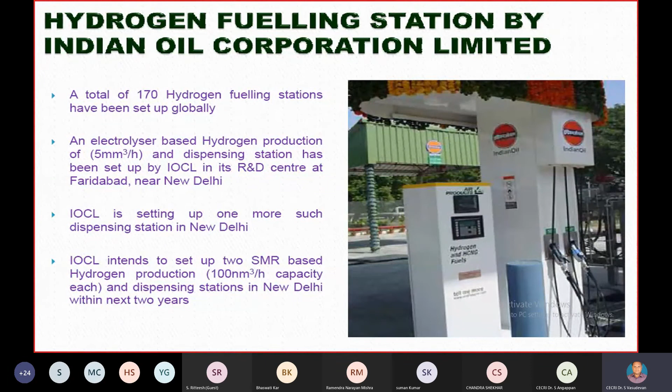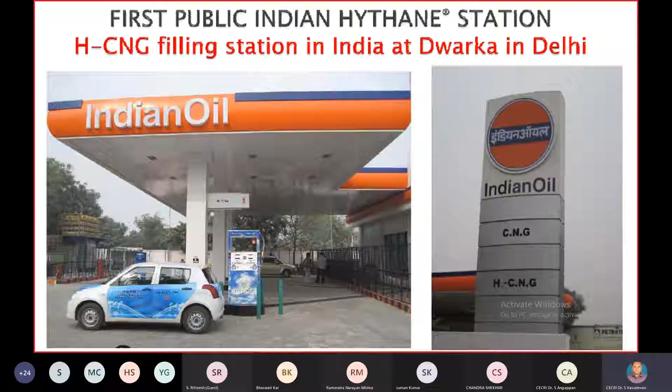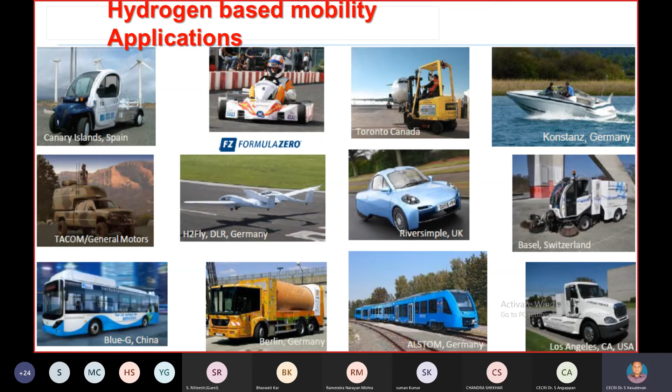So you can see hydrogen-based mobility in cars, trains, trucks, buses; in so many places hydrogen is utilized as an energy source. Even the zero-emission vision in the entire world: flights and aeroplanes are going to fly with hydrogen. In 2023, 10 to 20 seaters, to be developed through 2026, 2030 and 2040. 200-seat flights will be operated by hydrogen-based fuel cells. This is the ultimate aim for the aviation sector.

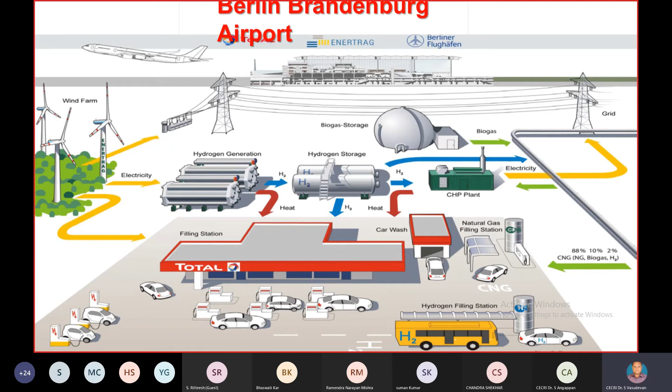So this is the model of the Berlin airport, completely hydrogen-based energy. They are taking energy from wind or solar, electrolyzing, storing and sending it to fuel cells, and the entire airport will be based only on hydrogen; even the flight fuel will be hydrogen. This is Germany's ultimate goal in hydrogen energy.

And in 2021 a hydrogen station opened in Silicon Valley, USA, with a capacity of 1,600 kg. So now petrol bunks are converting to hydrogen in the US. The happy news is our finance minister proposed the hydrogen mission in the last union budget. This is a very good initiative for India, giving budget for hydrogen energy.

Now people are talking about the cost of hydrogen, green hydrogen, but you can balance cost and benefit. The benefits are energy generation and repurposed infrastructure. Repurposed infrastructure means you can use the same space and the same pumping area; you only keep the electrolyzer and fill the vehicle. Avoid grid build-out, clean air, eliminate greenhouse gases, and deliver diversity of fuels. You can use hydrogen as multi-purpose energy.